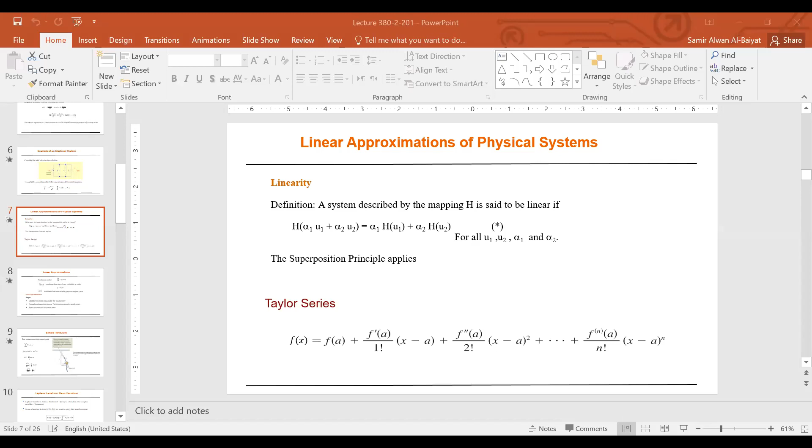Well, today we would like to continue with what we have started, talking about the mathematical models of systems. We said if we have physical systems such as circuits, we will be using KVL and KCL to model the system, to write the differential equation for the system. Okay, we will be also using Newton's law if we have a mechanical system. Okay.

Before we continue, is there any question? Is there a question? Yes, Doctor. In real life, in realistic models, it's not going to be clear, right? Using well-known formulas like Newton's law or what have you, for example, in electric, the mathematical model can be very sophisticated and cannot be, for example, determined analytically, right?

In some cases, yeah. Well, look, first of all, start from simple things, which you can do. And then you are right, systems are complicated, okay? You will model each one of them and then interconnect them together. Large systems, definitely, they are extremely complicated, okay? Sometimes they call it system identification, in which you excite your system and collect the data, and from those you can identify what type of system you have.

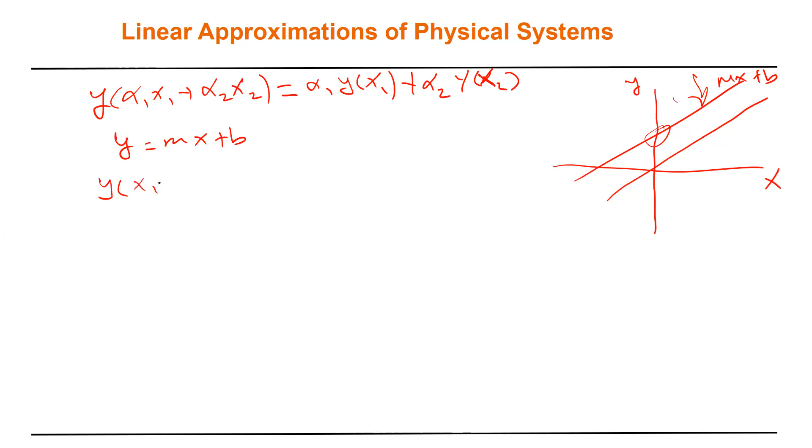Because look, let me use this one in here. Suppose alpha equal to 1 and y in this case equals, let's say, mx plus b. So y of x1 plus x2 equal to what? mx1 plus b plus mx2. Look, this is y1, but this is not y2. There is no b. If it's y2, it should be in this format. I should have the b.

Okay, let me explain it again. Look, y equal to m times x1 plus x2, plus b, which is equal to mx1 plus mx2 plus b. This is y2, but this is not y1. So y of x1 plus x2 is not equal to y of x1 plus y of x2. In this case, alpha 1 and alpha 2 are 1. Exactly. So if b equal to 0, then there is no shift, this will be y2 and this will be y1. I see. So we have a constant in the system, so it will not be linear.

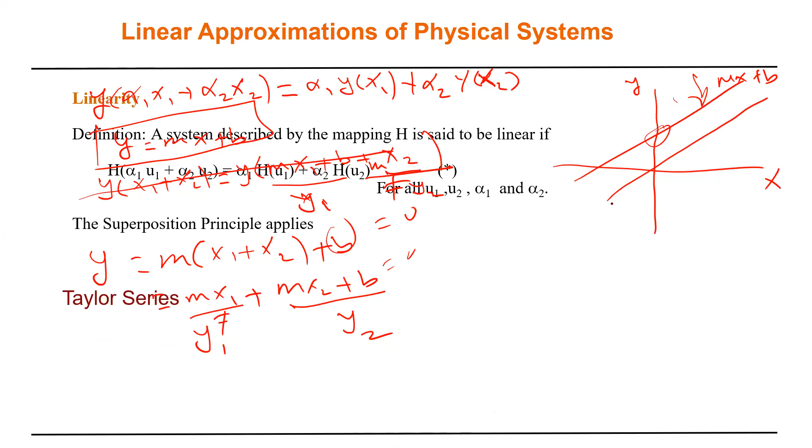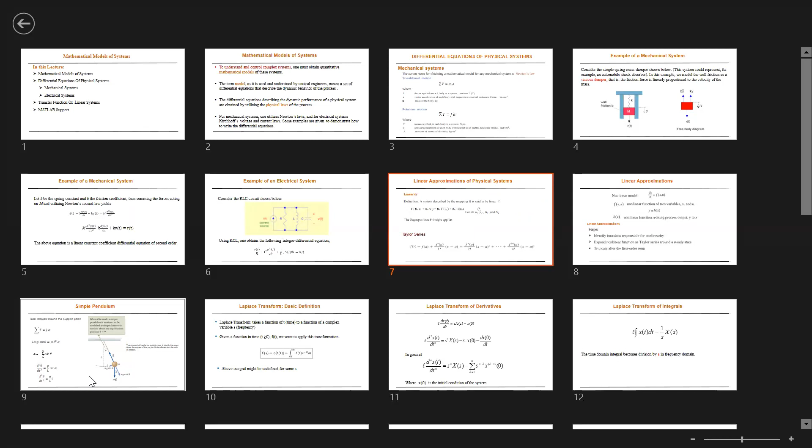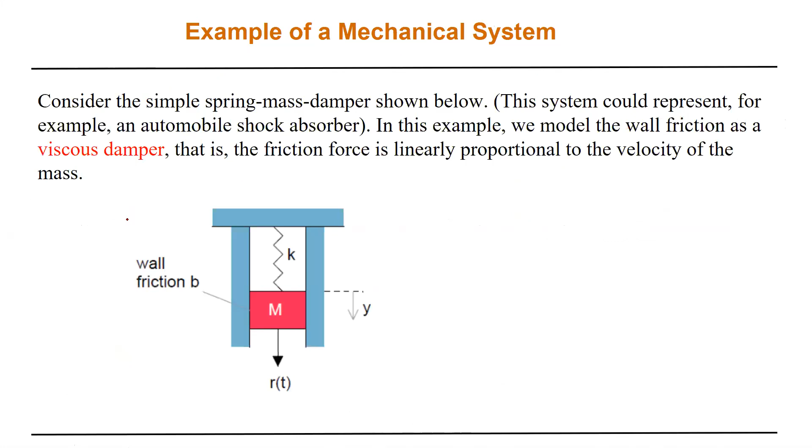So now, suppose I have a nonlinear system. Doctor, can you clear the board? Can I clear it? Yes, sure. Oh, sorry. What did I do now? Let me go back to slide 7. Okay. By the way, when I post the lecture, I post the slides as well as the video, so you can go back to the clean copy in the slide.

Suppose I have a nonlinear system. How do I linearize? Taylor series, for example. First order expansion. Taylor series. If f of x is a nonlinear function, I linearize it around a point called the equilibrium point, around A. So I will have f of A plus f prime of A over 1 factorial times x minus A plus f double prime of A over 2 factorial and so on. For a linear system, I will keep only this term and ignore all the other terms.

This will always be 0 because, suppose I have x dot equal f of x. I expand this around the equilibrium point in which x dot equals 0. By solving this equation, I get the point I want to expand around. In this case this will be 0, and I keep only the first term and ignore the others. So I get a linear model. Of course, my linear model is valid around A, not everywhere. So it will be local. I'm localizing it.

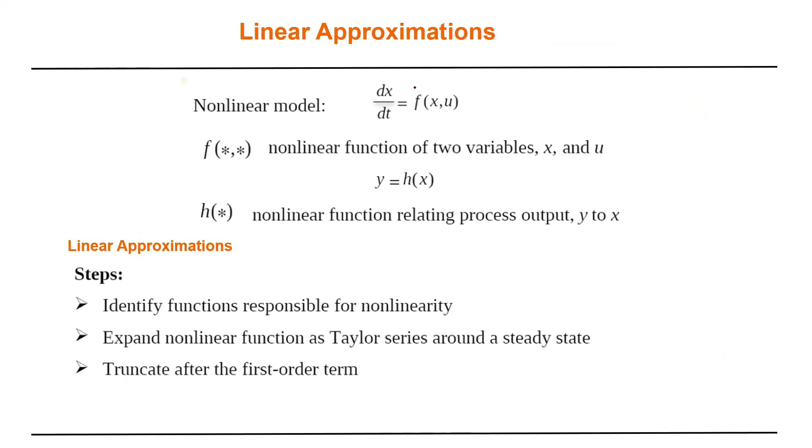This is basically what I'm saying. Suppose I have dx/dt as a function of x, the state, and u; later on we'll talk about those. In general, if I have a nonlinear function, I can identify the nonlinearity, expand using Taylor series, and truncate after the first order term. Let's take an example. This is the simple pendulum.

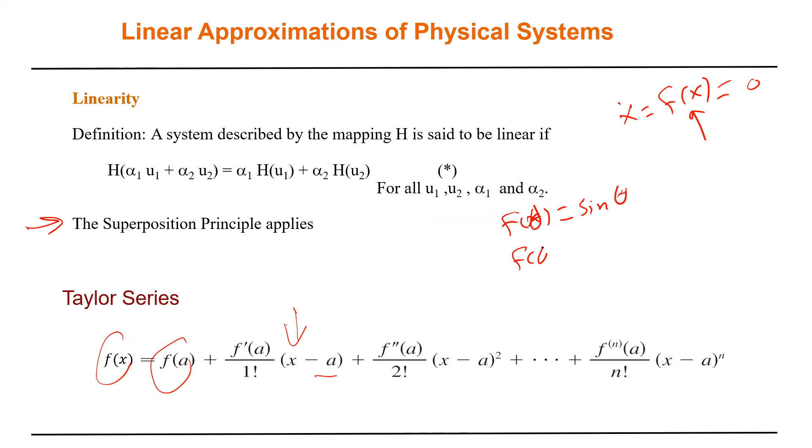F of theta equal to sine theta. I'm expanding around zero. So f of theta equals f of 0 plus f prime of 0 over 1 factorial times theta minus a, where a equals 0, so theta, plus the other terms. What's f of 0? What's sine of 0? 0. Plus the derivative of sine theta, cosine theta, evaluated at 0: 1. So this will be theta.

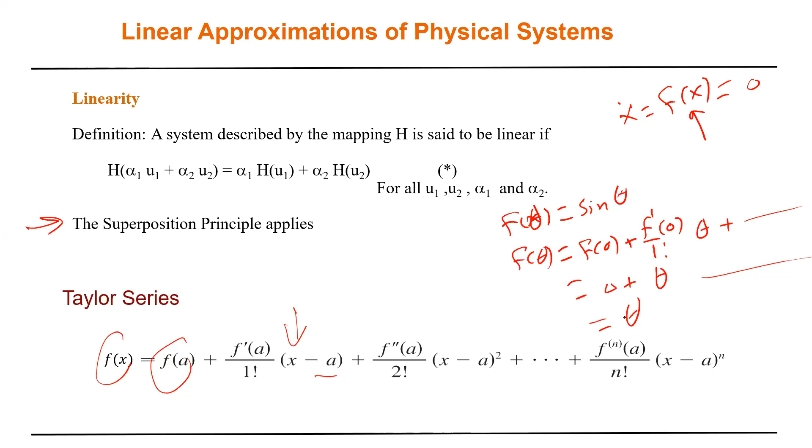I ignore the higher order terms because I want to keep only the linear term, which is equal to theta. Any question? Where did the g over L go, Doctor? It was sine theta g over L. Yes. Those are constants. I don't care about them.

Doctor, for this approximation theta has to be very small, right? Exactly. That's what I said at the beginning. The model is valid around the point of expansion. In this case, I'm expanding around zero. Within, let's say, 30 degrees, a certain very small range, that will be perfect.

Usually sine theta equals theta approximately if you take theta in radians. For example, if theta is 0.1, sine of 0.1 radian will be about 0.1. But if you go to 45 degrees, which is pi over 4, the answer will not be accurate at all. That's why the linear model is valid for a certain point.

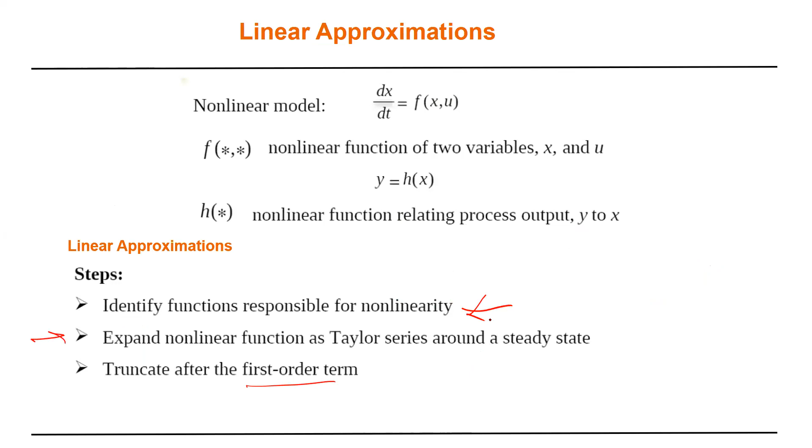Oh, so this is the approximation. Yes, this is constant. No, I mean the one under is the approximation. Okay. The constant will be out; you just multiply. There's a note that says identify the function responsible for nonlinearity, expand, and then multiply by the constant. The constant has nothing to do with it; you just multiply by it. Okay, this is good. Thank you.

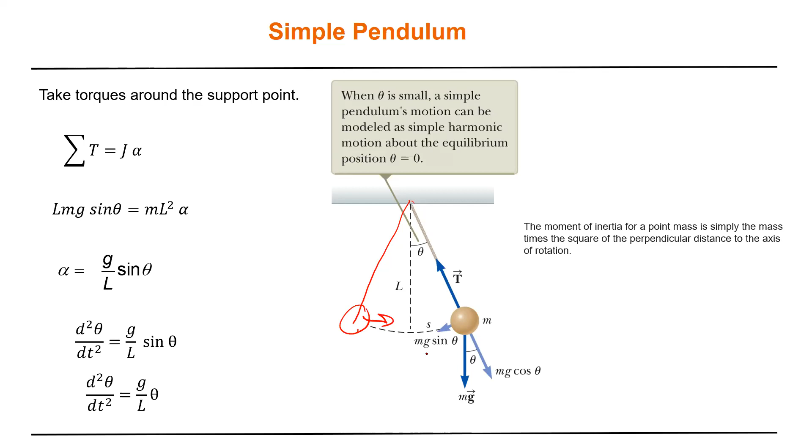But look, anyway, I'm not going to go into that much of the physics of it. I just want to point out, okay, you could have a nonlinear system, and this is the way to do it. The simple pendulum is in Physics 101. I think in your textbook they also put it, if I'm not mistaken. I think this is the typical example in any nonlinear course.

Okay, now let's move into the Laplace transform. The definition of the Laplace. I'm not going to go over the Laplace transform; I just put in here the definition. If I have a function f of t, how do I get the Laplace transform of that function? Basically I integrate from 0 to infinity of the function multiplied by e to the power minus st dt, and then we'll get F of s.

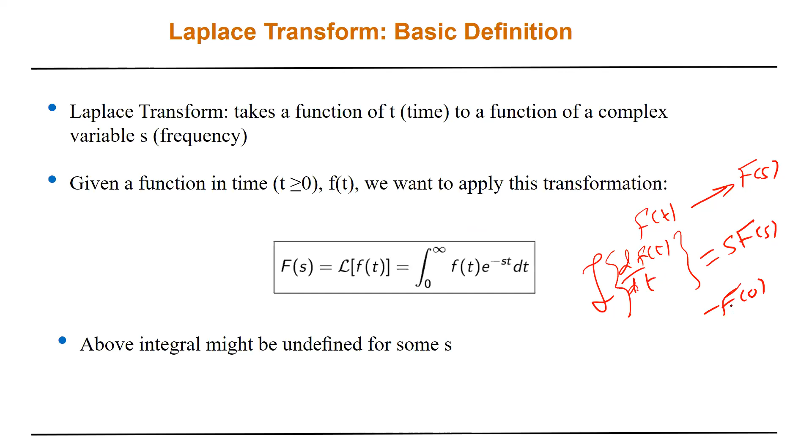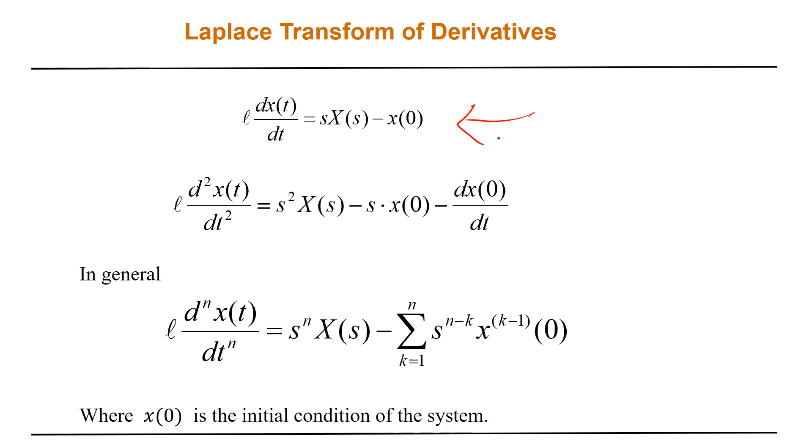Now, what's important: if f of t gives me F of s, what is the Laplace transform of df(t)/dt? What does that say? sF(s) minus f of 0. Okay. Yes. F small, Doctor? Yes, small, not the large. f of t, because the initial condition is associated with t, not with s. So this is basically what I'm saying. This is in general. If you have an integrator, then you will replace it by 1 over s.

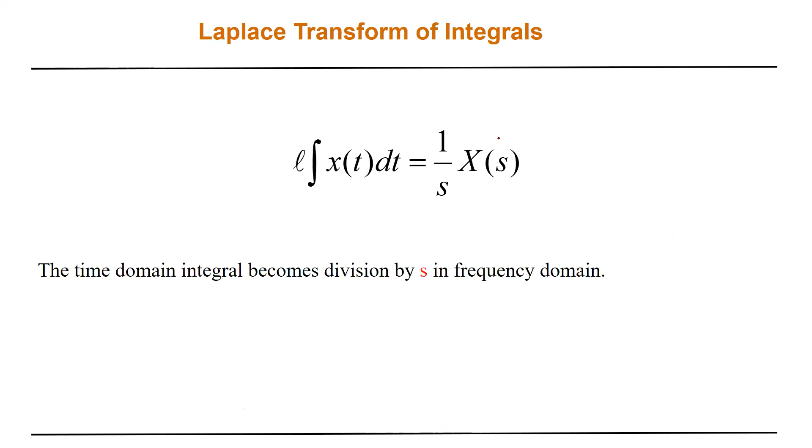Well, let's talk about the transfer function. I will give you a homework. The homework will be how do you go back and forth between the time domain and the s domain. But as I said, I assume that you already covered this material in 207. I'm sure it's well covered there, and there is no need for us to repeat it here.

Now let's talk about the transfer function. If you remember, if I have a box, the transfer function for this system is defined as the ratio of the output to the input, setting all the initial conditions to 0. By the way, the transfer function is of linear systems. If you have a nonlinear system, the transfer function will not be defined. There is no transfer function for a nonlinear system.

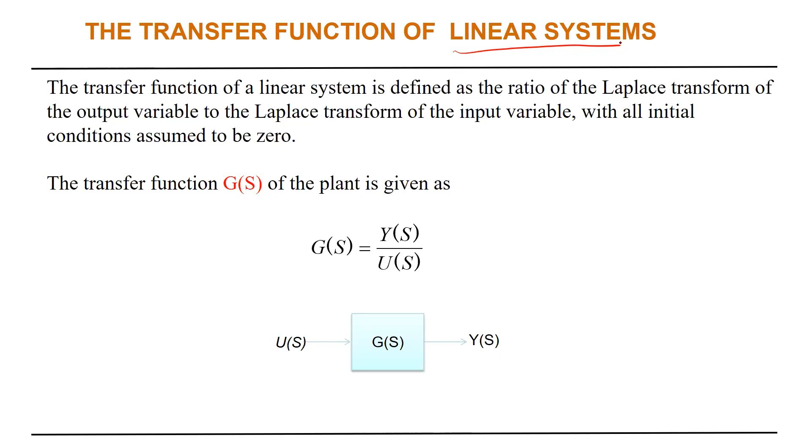Doctor, I just have one question. Fadal. How did we get d squared y over dt squared? How do I find this one? Did you attend the last lecture? Yeah, I attended, but I didn't get it. Well, basically, okay, look here again.

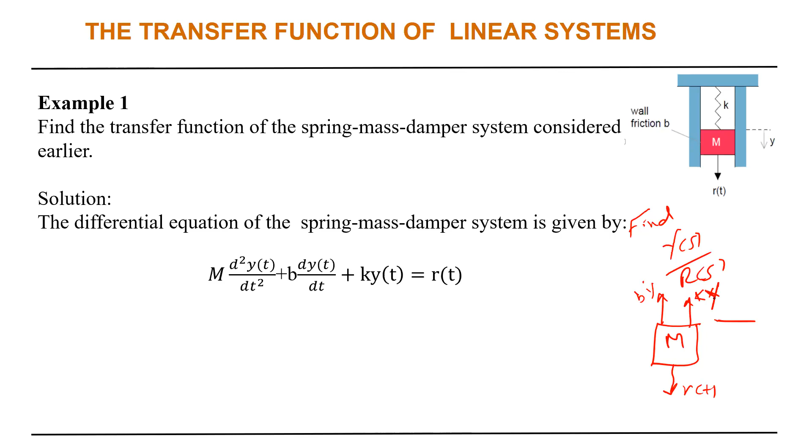And also we have the spring itself. This is K times Y. Okay, now write Newton's law. Newton's law will be the summation of the forces equals m times the acceleration. So the force: R minus KY minus BY dot equals m Y double dot, the acceleration.

Now, as I said, each derivative in the transform domain will be replaced by S if the initial conditions are 0. We are doing the transfer function, so we set the initial conditions to 0. So what do I have here? The first one gives me m S squared Y of s, plus bs Y of s plus k Y of s equals R of s.

Now take Y of s. So Y of s over R of s, which is basically the transfer function, equals 1 over m s squared plus b s plus k. Then we find the zeros and the poles, right? Yes, but for the time being, let's focus on the transfer function. This is the transfer function.

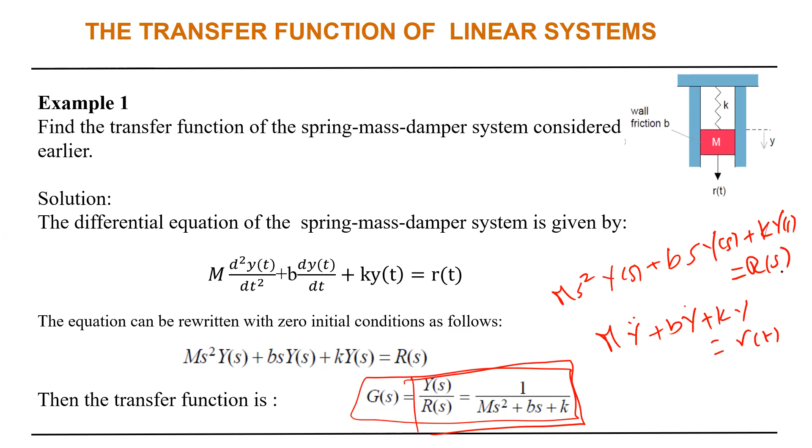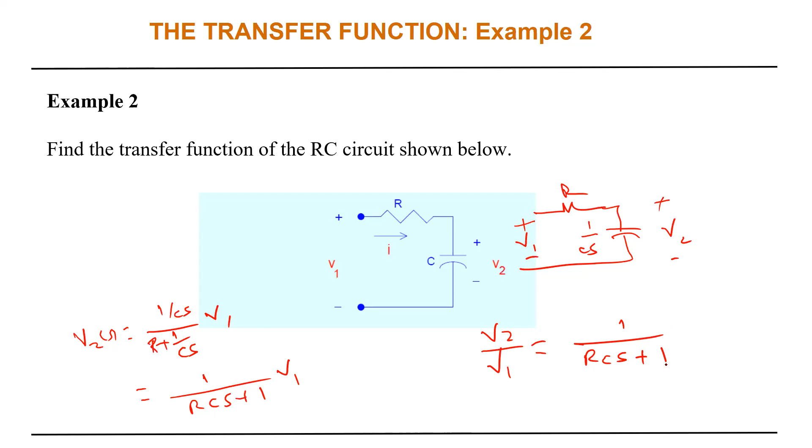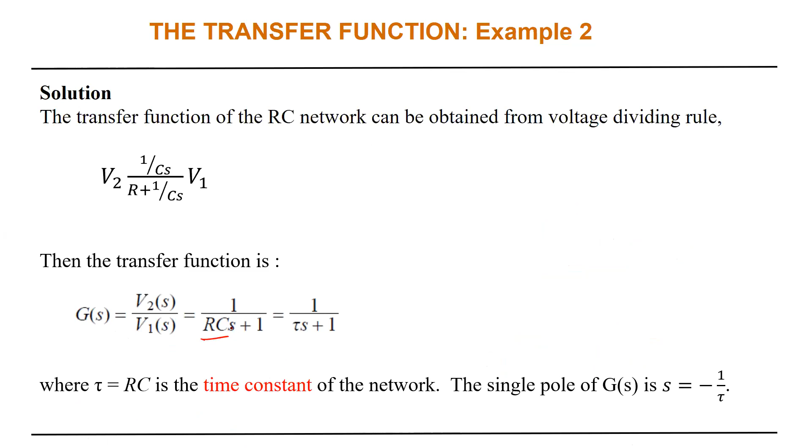Well, in here, the only thing we add: you can define RC as the time constant of the circuit, and you replace it by tau. So the transfer function of the system is the ratio of the output to the input, and it's written as a polynomial in the numerator and a polynomial in the denominator.

Now we are introducing a new definition. The system is called proper if n is greater than or equal to m, the degree of the denominator greater than or equal to the degree of the numerator. If this is the case, we call the system proper. Otherwise, the system is improper. Basically, if the degree of the numerator is greater than the degree of the denominator, the system becomes improper. We will be working in this course with proper systems only.

Physically, if you are talking about the time domain, it means that in an improper system, the derivative of the inputs is greater than the derivative of the outputs, which we are not going to work with in this course.

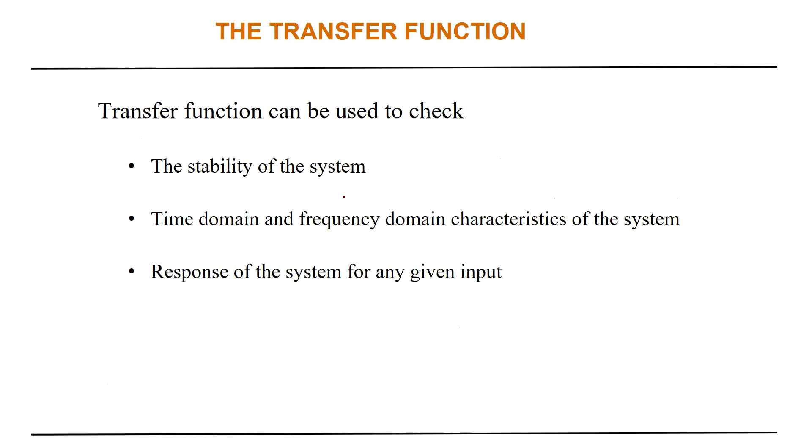Well, Doctor, yes. I'm gonna ask another question. Us? Oh yeah, after. Sorry.

Doctor, I have a question. Go ahead. For the transfer function, why are the initial conditions zero? Well, this is the way they define the transfer function. This is the way they derive it. Look, with this model, later on we are going to have another model called the state space model.

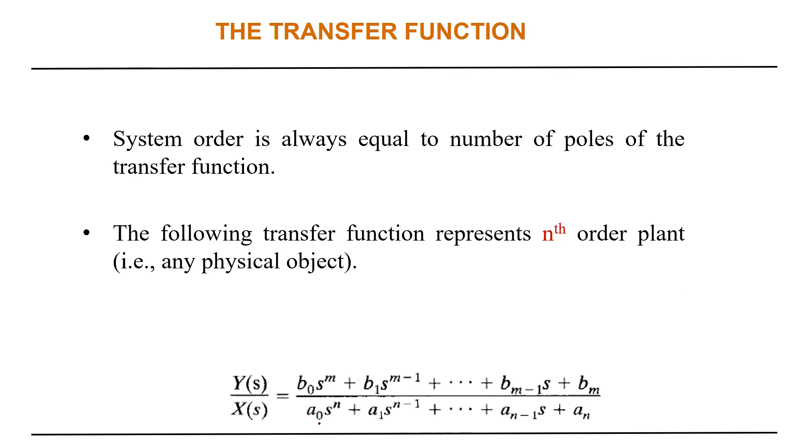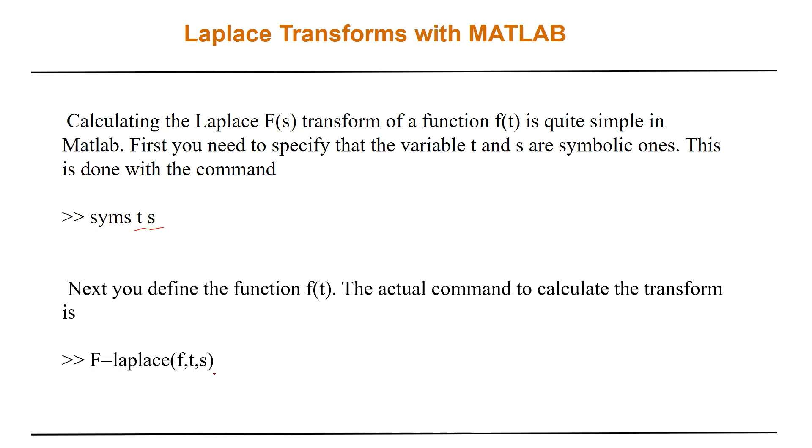You can also go back if you have the Laplace of a function, to the function by using another command called ilaplace, to go back from the S domain to the time domain. This is very powerful. It will help you if you have a complicated function. You can use MATLAB to find the transform for you. Is there any question before we stop?